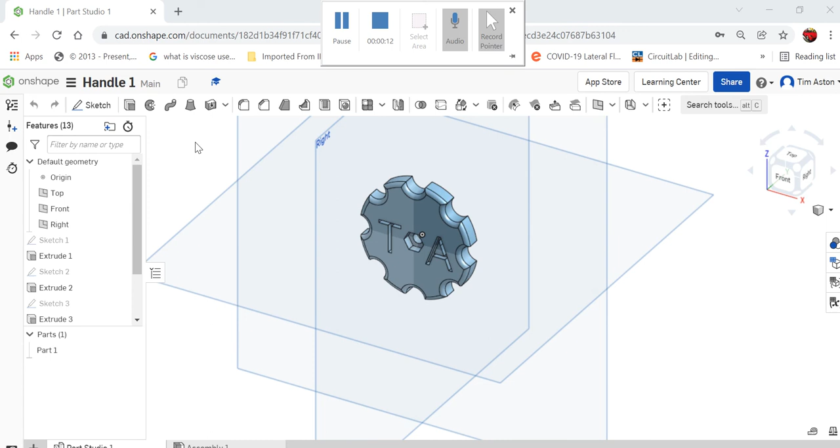Once you've created your own Onshape account, which you'll have done in the previous video, you will then need to head to your home page. The handle we're going to be doing will look something like this, and it will be 3D printed. If you click on Onshape top left, it'll bring you to your home page.

This is where it stores all the parts you've been designing. So we need to go to create, then document, and we'll call this 3D print handle, and it will load up our workspace.

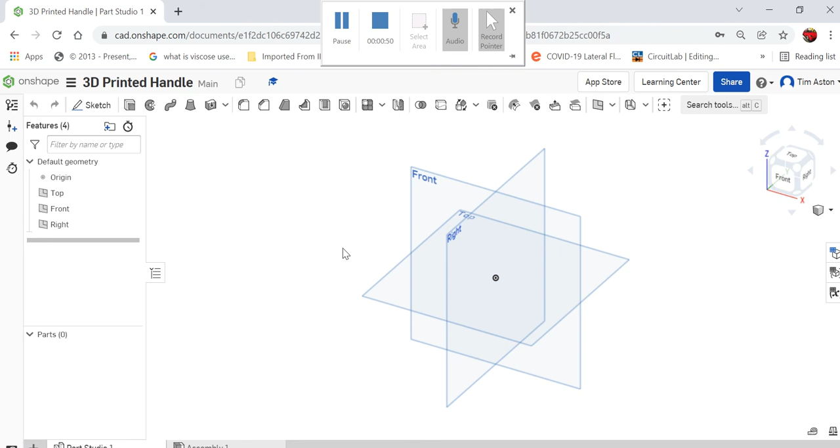The first thing we need to do is create a sketch. It's a two-dimensional sketch, so I click sketch and select one of these three work planes to sketch on. I'm going to sketch on the front plane, so I click on the front plane. Now, as it's two-dimensional, I want to look at this from a two-dimensional view, so I'm going to use this navigation cube and click on the front, and now I'm drawing two-dimensionally.

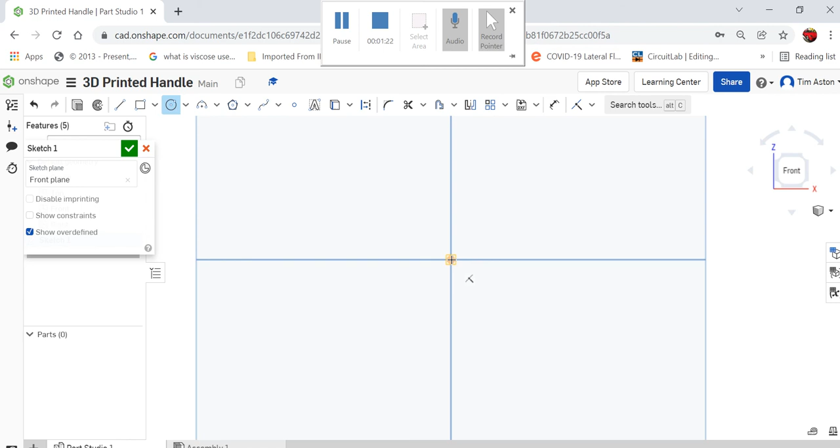It's really easy for me to see my two-dimensional drawings. Now I'm going to zoom in and start with a circle, hovering over the central node. It will go orange, so I know I'm connecting to it, and I'm going to draw this. This wants to be 45 millimeters diameter. So I left click once, and it gives me the opportunity to specify the diameter. I type in 45, and you'll notice that value changing, and I've drawn a circle at 45 millimeters diameter.

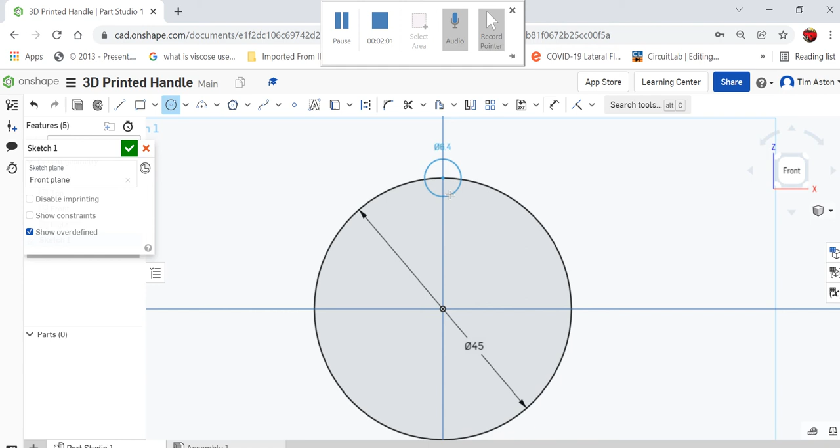Now I need to put some grips on this, so whilst I'm still in the circle tool, I hover over that there, and I've attached another circle to both the axes at the top and the axis where it meets the circle, that intersection there. And this wants to be, let's go for 7. So I left click once, specify my size of 7, and click return.

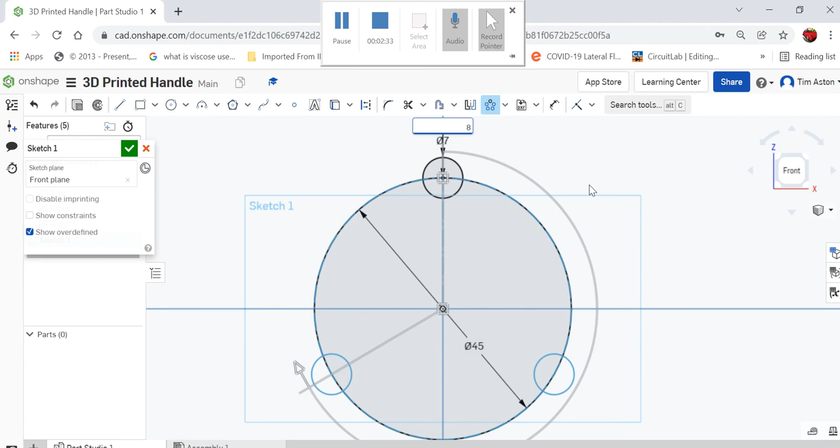Now, once I've done that, I want to repeat this. This is quite a clever tool. So I escape the circle tool, select the circle, and use the transform tool, going for circular pattern. It's selected my node as my central axis and specified 3 repeats. But if I hover over repeat, I can change that value to whatever I need, like 8 repeats. I select, left click, and move away from it. So I've now got those 8 circles.

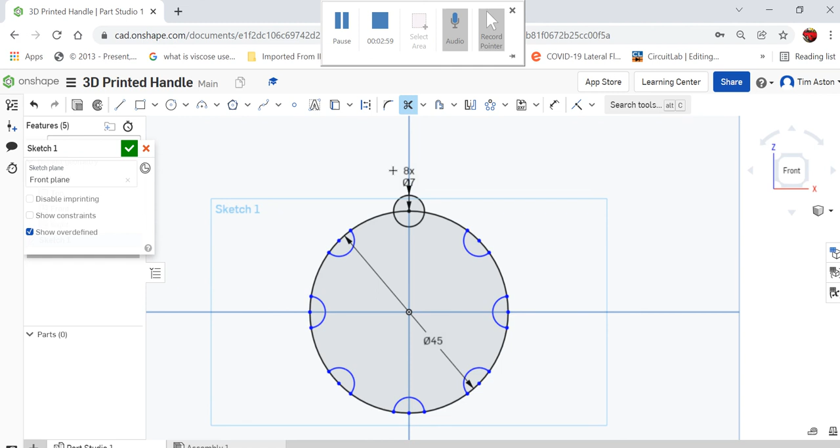The next tool we're going to use is the trim tool to remove the material we don't want. So I'm going to trim there, there, there, there, there, nibbling away the bits I don't want. Then I click my little green tick, the check there, to confirm my sketch.

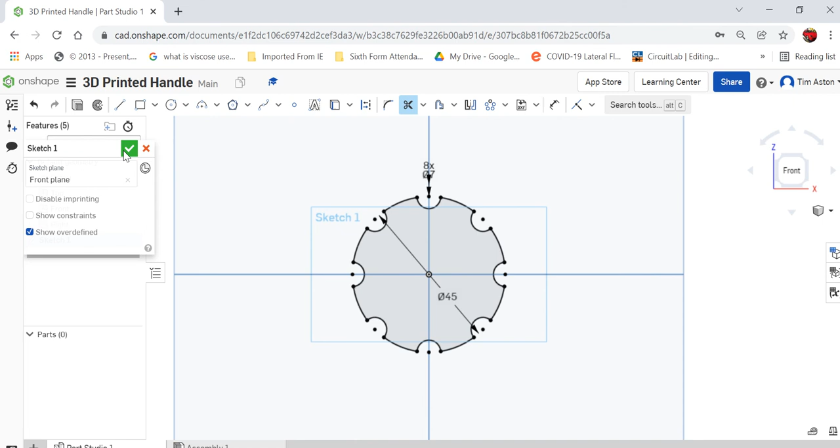That's a two-dimensional sketch, but what I want to do is look at it three-dimensionally. So I go back to this other navigation cube and click isometric, and turn this from a two-dimensional sketch into a three-dimensional solid. So I click the extrude tool, select that part, and extrude this through 7.

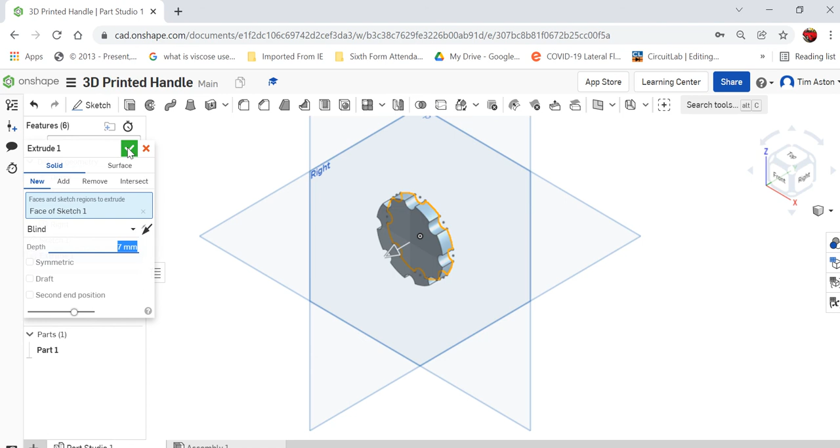I'm going to click the tick to confirm it, and I've selected that as my solid now. Let's go for the isometric view again, and I'm going to click on my sketch, as I want to draw a sketch on this front face.

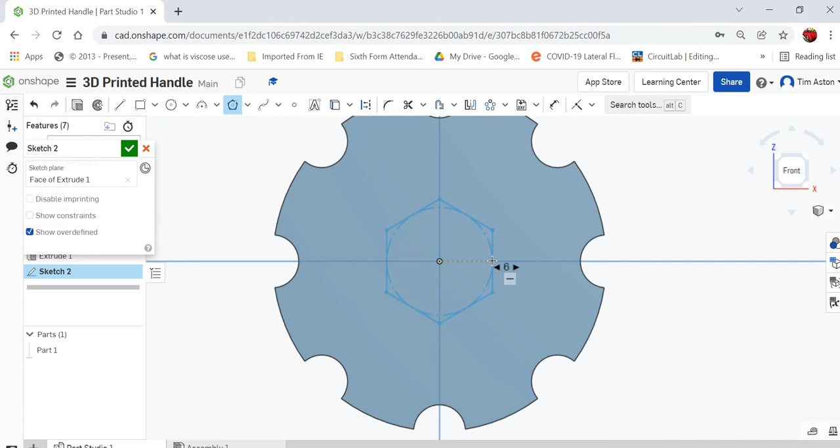I'm going to go to the front, zoom in, and draw a polygon here. I've selected a 6-sided polygon, and the polygon wants to be 8 millimeters in extreme dimensions, so I'm going to use the dimension tool.

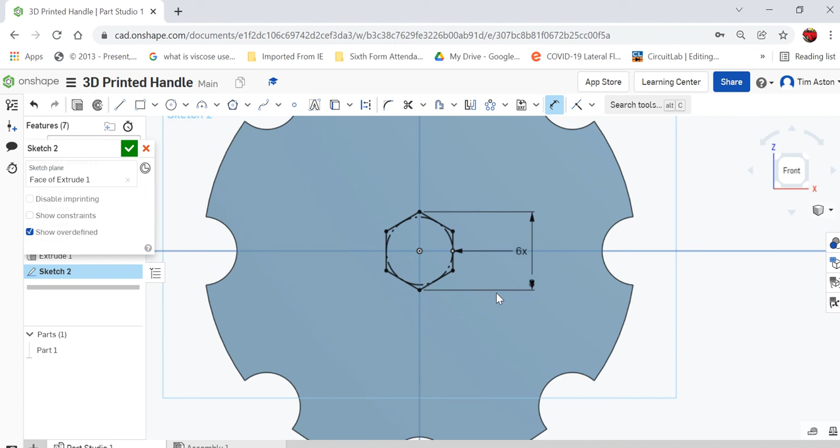I've selected it, clicking that point and that point. I'm going to drag a dimension away from it and click 8, and it's sized it down to 8 millimeters. Now I'm going to confirm that.

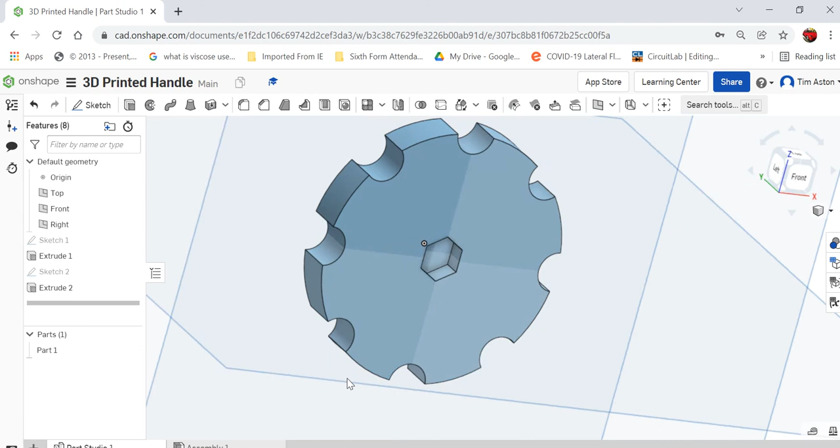I'm going to isometric, and use the extrude tool now. Instead of using it to add material, I'm going to use it to remove. Clicking remove, it's already worked out that I can remove it from there. I'm going to change my value to 3.5 and click return. That is the space for our hexagonal headed bolt to fit through.

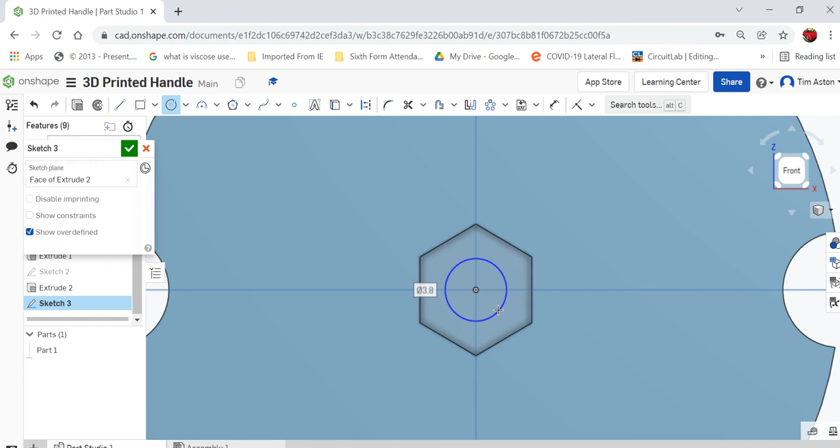We then need to put a hole in here, so I'm going to create another sketch. I've selected that inside face of the hexagonal shaped hole, clicked front to zoom in, and I'm going to draw a circle on my central node again, with a dimension of 4.5. I'll click the tick and move away from it.

Again I want to use the extrude tool. I'm going to select that circle, and again I don't want to add material, I want to remove it. So I'm going to push it away - if this is 7mm, we've gone in 3.5 already, so go another 3.5.

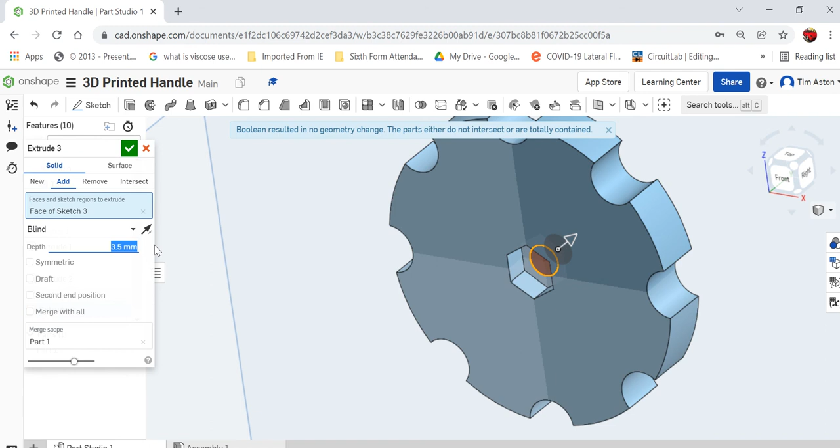I realised there that I added material rather than taking it away, so I'm going to delete that and start again. Click the extrude tool, select that, and push it the other way. Select remove, type in 3.5, and click the tick. If you notice there, it's put a hole in there.

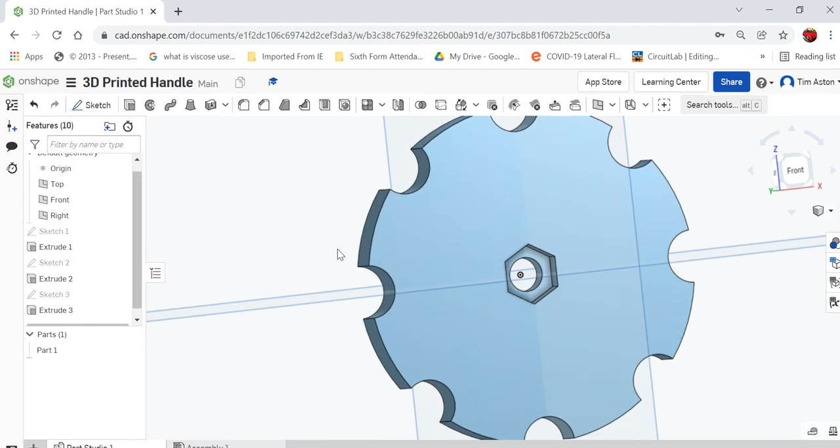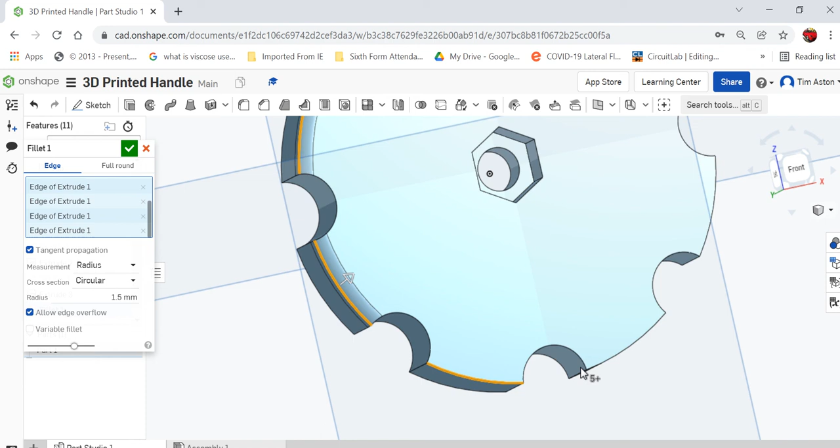Now we've done that, I'd like us to soften these edges a bit, so we're going to use the fillet tool. I've got fillet there, top left, select my radius. I'm going to keep the radius value at 1.5, and work my way around those corners, just on the outside. Click the tick, and you'll notice I've softened those edges using the fillet tool.

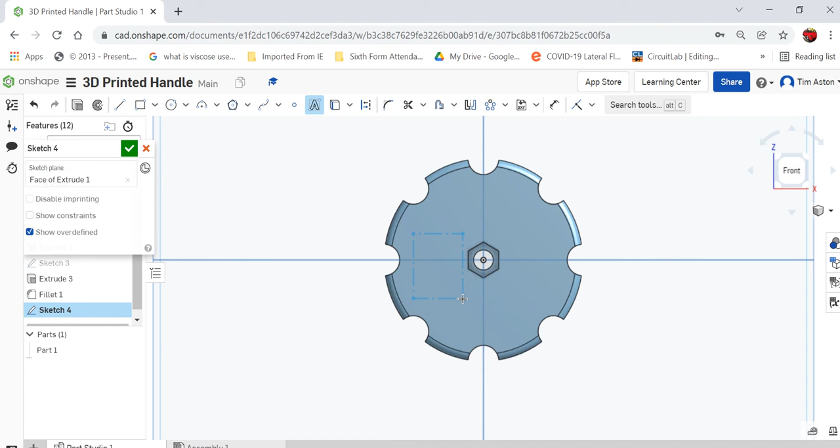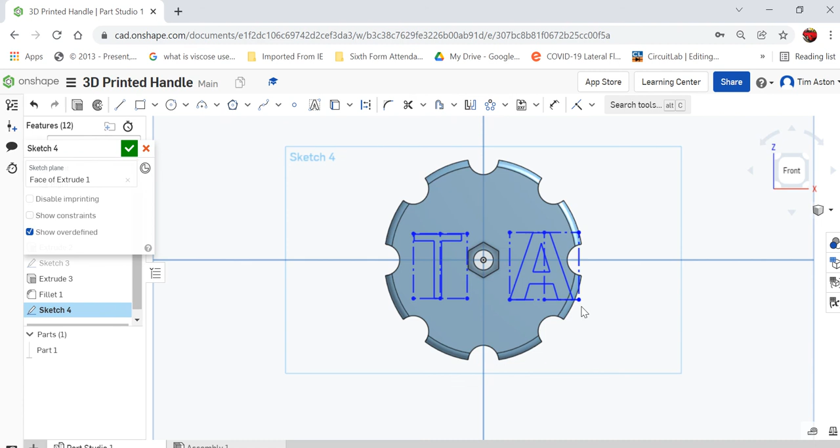Now, finally, we might want to personalize this, so I'm going to start a new sketch on this front face. Selecting that face, looking at it front on, I'm going to use the text tool and drag a box there. I'm going to put a T there and make it bold, click my tick, and add a T there. I have another text box just here, selecting bold and A, click there, and just squeeze that in a bit.

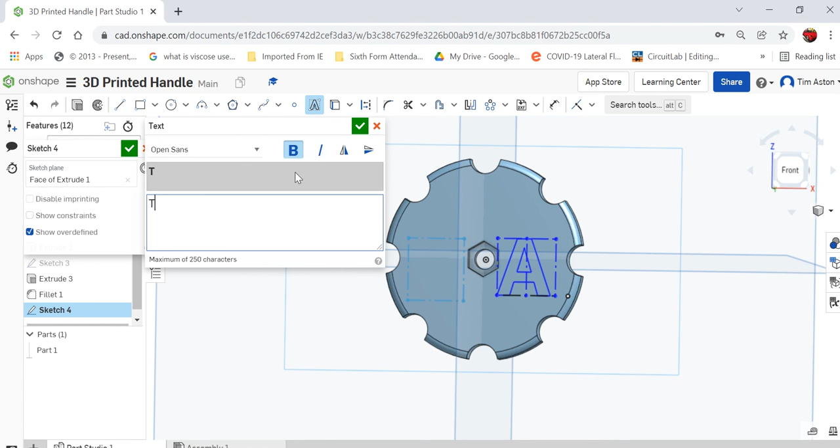I'm going to just have another look at that T there, so I'll put the T back in, and select bold and T, and the A. Now we've got that, I'm going to look at it from an isometric view to see that I'm happy with it.

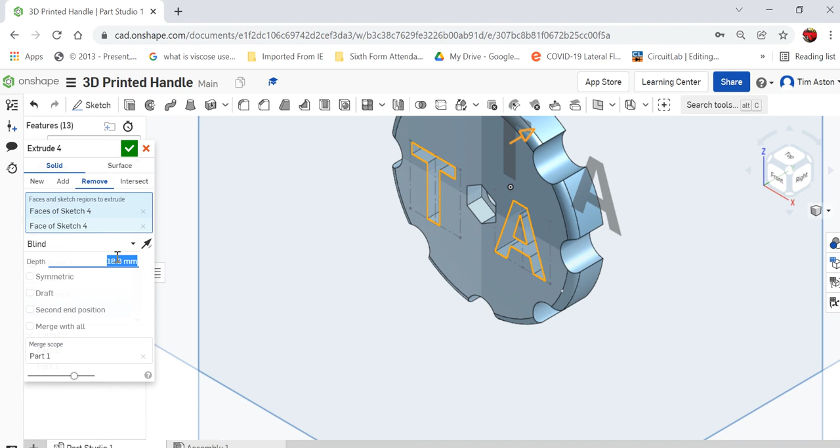What we can then do is use the extrude tool, select the T and the A. You can either add material to the face or take it away. I'm going to subtly take it away, just a remove of 1.5, so it's got just a shallow T and an A in there. If I zoom around now, we've got that personalised with a T and an A. Hopefully you've been working along and you have something similar.